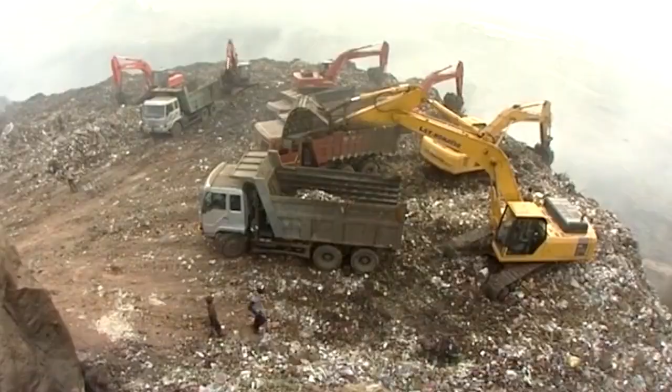health and environment. With a commitment to better the environment and to provide the best sanitation services to the citizens of Hyderabad, Ramky Enviro Engineers, a pioneer in waste management, has established a quality delivery system, the Integrated Municipal Solid Waste Management Project. The HIMSW project uses the most environmentally sound strategies for municipal solid waste.

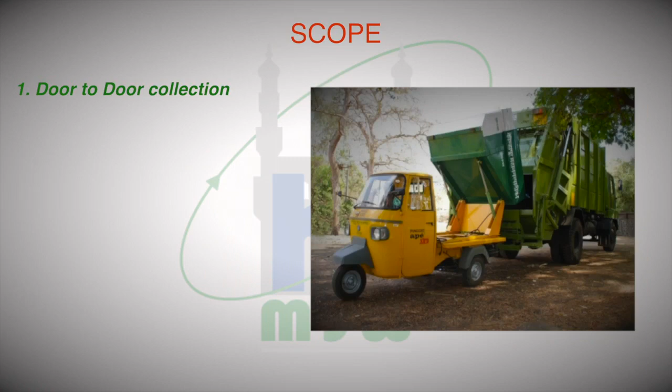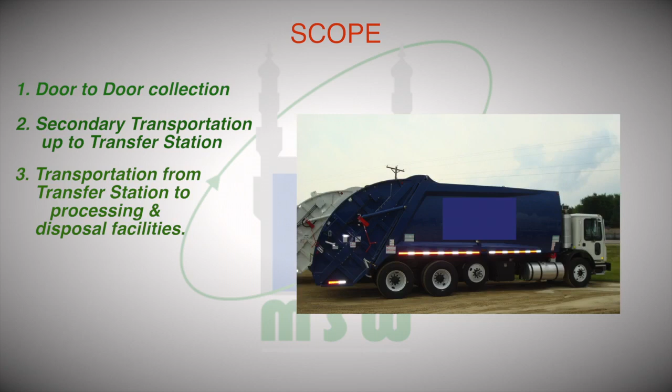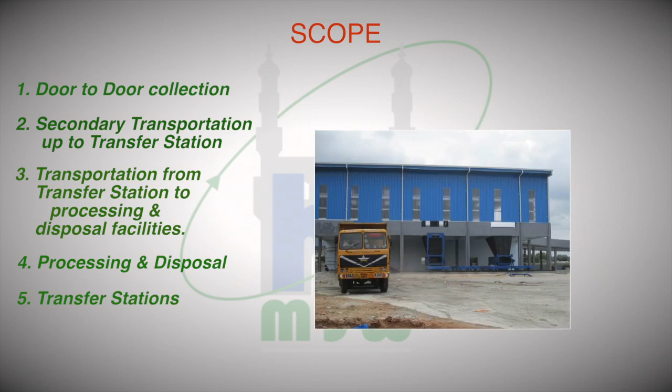Scope: door-to-door collection, secondary transportation up to transfer station, transportation from transfer station to processing and disposal facilities, processing and disposal, transfer stations, reclamation and alternative use of existing 4 dump sites.

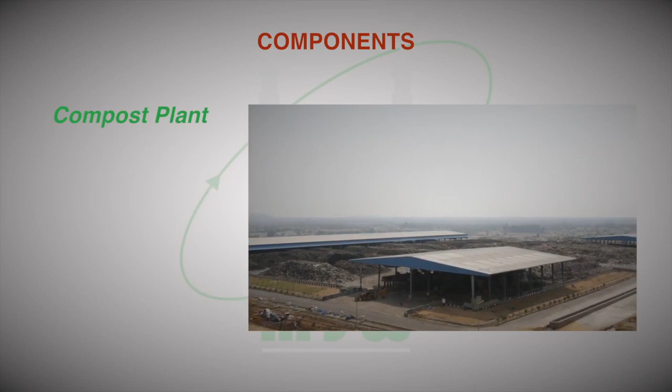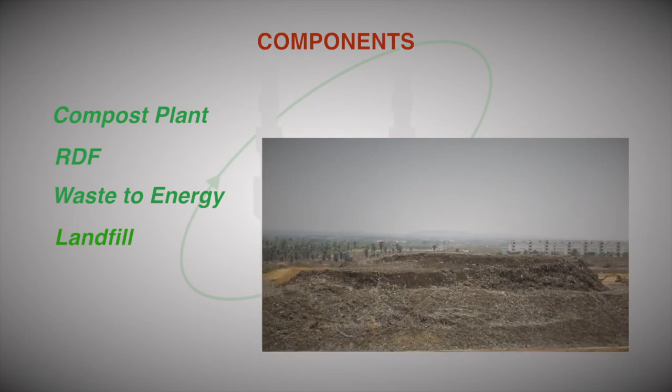Components: compost plant, refuse-derived fuel, waste to energy, landfill operations, capping of existing dump, leachate management.

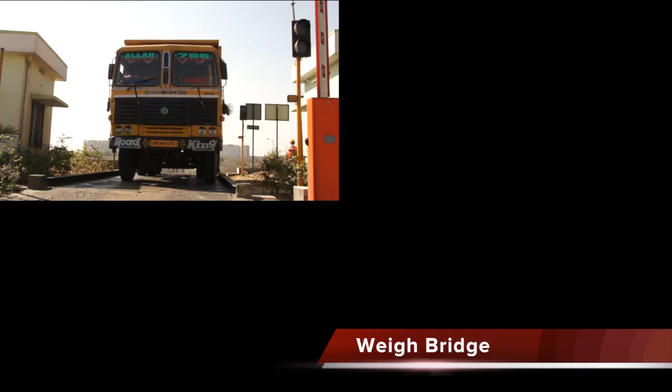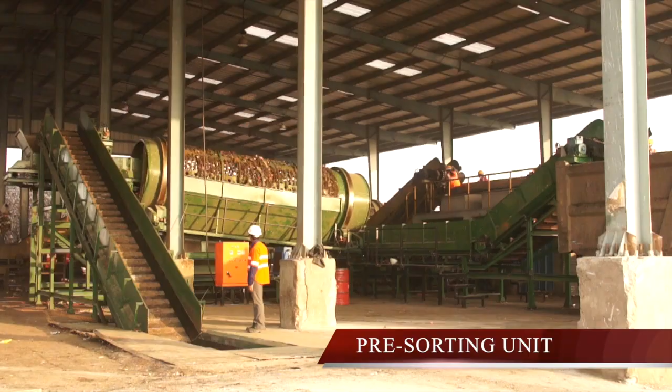The waste transported from the transfer stations is brought to the facility where each truckload is weighed and data entry is made using computers with data servers for storing and retrieving each entry. The weighed trucks offloaded at the tipping floor of the pre-sorting unit are loaded onto conveyors using dozers. The waste is passed through a 100 mm rotating screen or trommel with screens of 100 mm sieves.

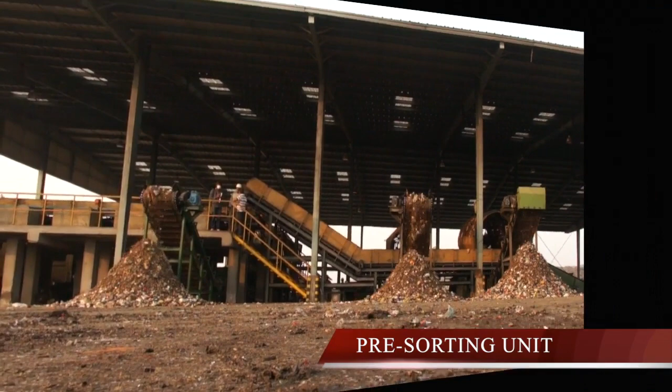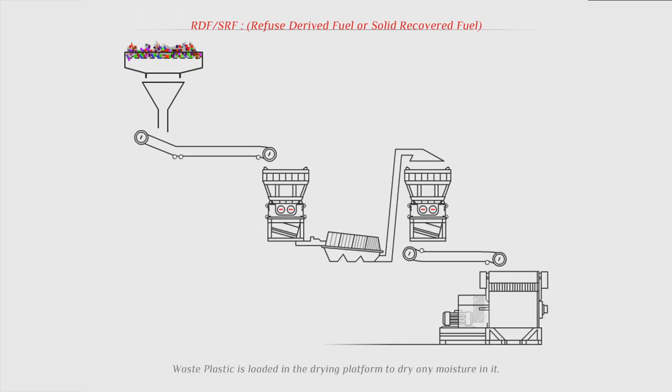The recyclable material, like plastic bottles, is recycled at a recycling plant inside the facility. The material besides the recyclables, with size more than 100 mm, is known as combustible material due to high calorific value. Refuse-derived fuel. The segregated combustible material is further processed to get refuse-derived fuel or solid recovered fuel. The combustible material is stored on a dry concrete platform to ensure maximum moisture removal by sun drying.

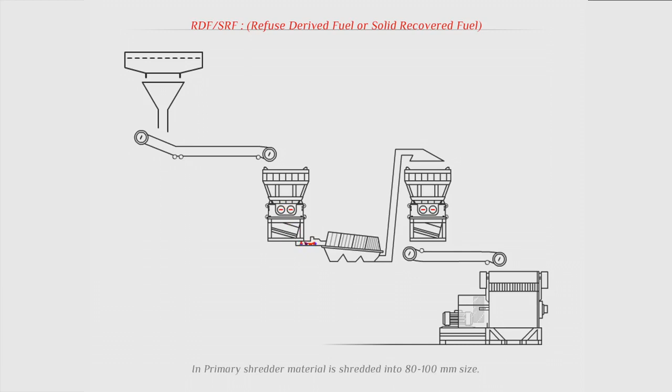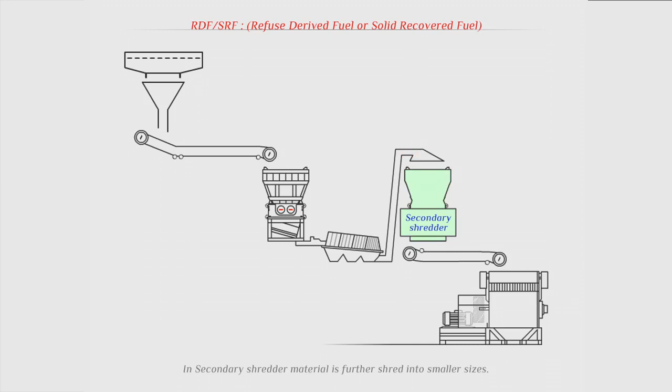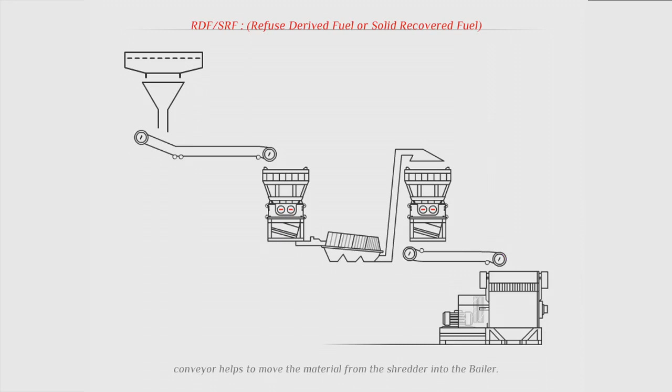The dried material is fed to the hopper of a primary shredder, where the material greater than 100 mm is shredded to 80 to 100 mm material. The primary shredded material is fed to the hopper of a secondary shredder that reduces the material size to less than 25 mm. The secondary shredded material is then conveyed to a baling machine for packing the material. These bales are then stretch wrapped and transported to cement industries as fuel.

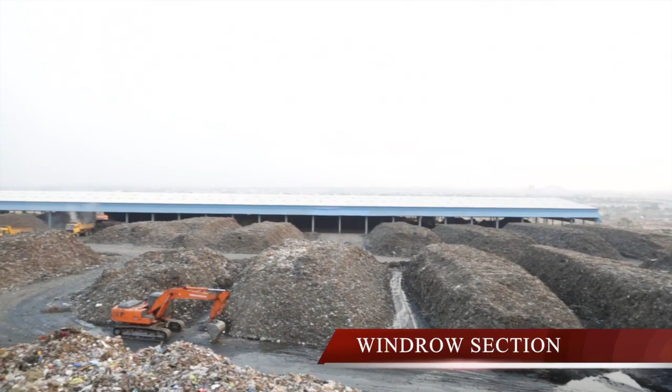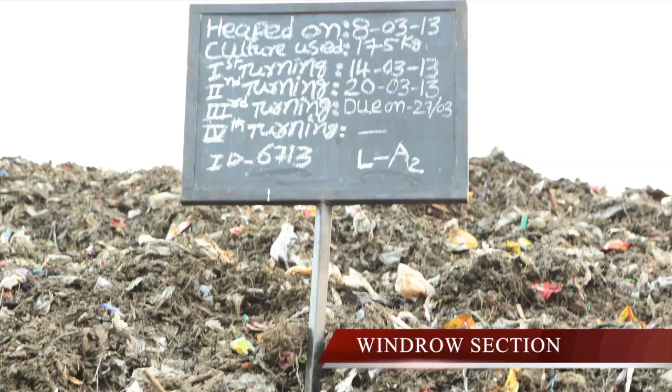The segregated material passing through the 100 mm sieves of the trommel is further processed using the windrows process. The windrows are turned for 28 days to ensure complete exposure of organic material to oxygen. The windrows are sprayed with herbal sanitizers to ensure better decomposition and ensure no odor is generated.

The material from the windrows section is further refined by passing it through rotating screens of 35 mm sieves. The material with size more than 35 mm is segregated, which can be briquetted and used as an alternative fuel to fossil fuel in energy-intensive industries.

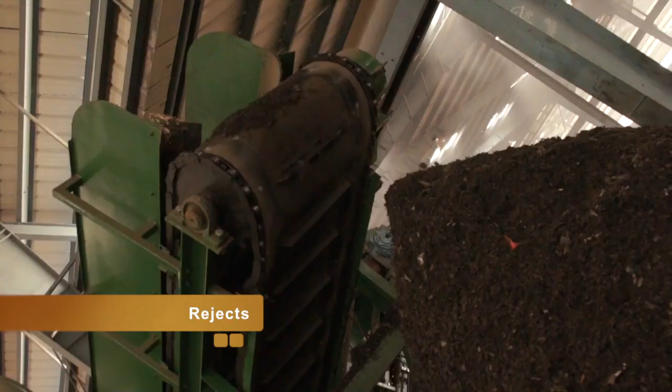Material less than 35 mm is further screened using trommels with screen or sieve size of 16 mm. The material with more than 16 mm size is segregated and briquetted for cement industries as fuel. The material less than 16 mm is stored in the curing section for final screening and curing.

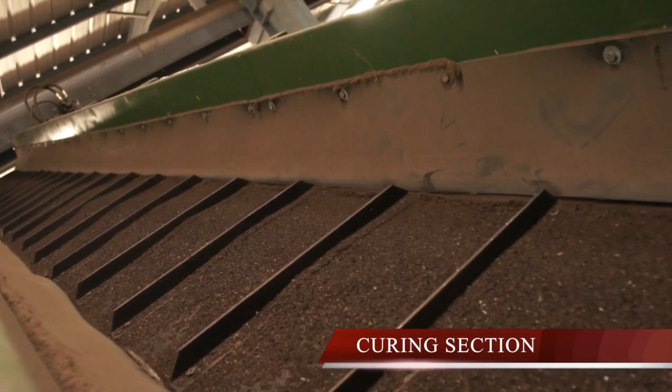In the curing section, the output of 16 mm screening is sent through a final set of screens or trommels, which segregates materials less than 4 mm. The final output is refined, which meets the fertilizer control order standards and is used as biofertilizers in the agricultural sector.

The final output is further blended with additives to improve the product value and packed in a blending and packing shed for dispatch to fertilizer companies. Other recovered products include coconut coir pith from shredding of coconuts. The coir is baled and sent to small-scale industries and as fuel to factories.

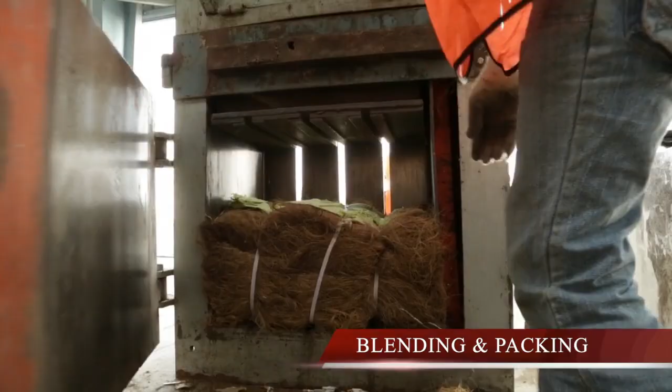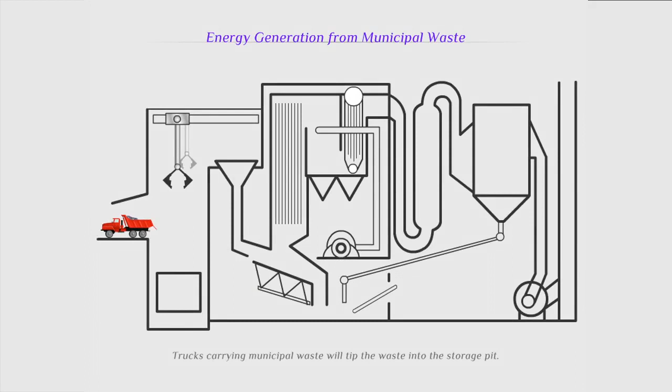Waste to energy. The waste from the trucks is tipped in a storage pit. The storage time for the waste is 7 days with leachate drainage for charging the waste. The charged waste is fed to a hopper using cranes.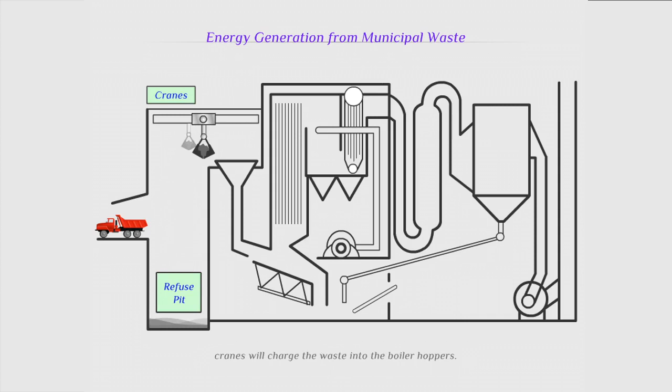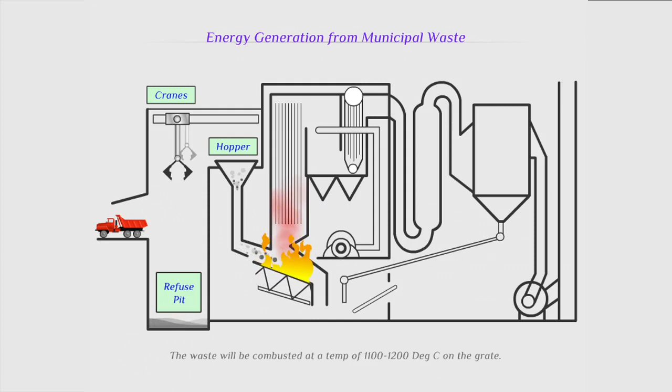The waste is then passed on to moving grates that combust the waste at a temperature of 1100 to 1200 degrees centigrade. The engineering design of the furnace ensures that the intermediate gases go through complete combustion to maintain a temperature of 850 degrees centigrade. Maintaining this temperature ensures that dioxins and furans are not formed in the process.

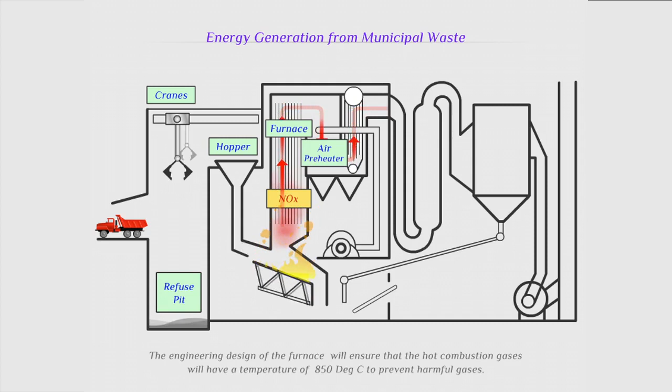The heat energy is passed into a boiler for generating superheated steam. This steam is used for driving the turbine and electricity generation. The electricity generated is exported to the grid after captive consumption of 15 to 17% of total electricity generation.

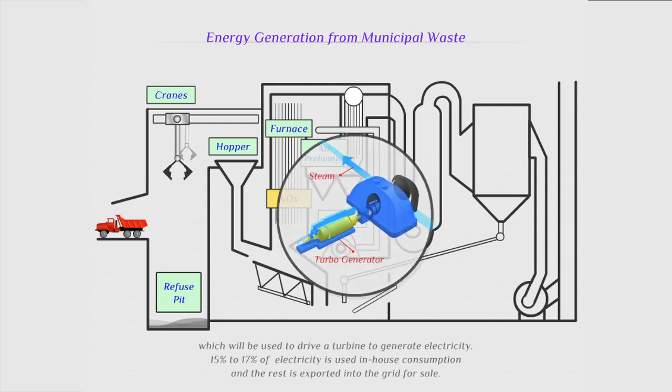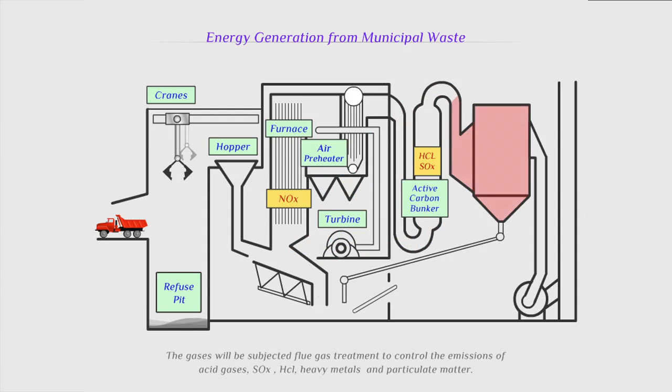The residual gases from the process are passed through an air pollution control system, which comprises scrubbers for removal of acidic gases such as nitrogen oxides, sulfur dioxide, hydrochloric gases, any heavy metals, and activated carbon filters. Any particulate matter is removed by using dust collector systems and precipitators. The bottom ash from the incineration process is removed and can be used for construction purposes.

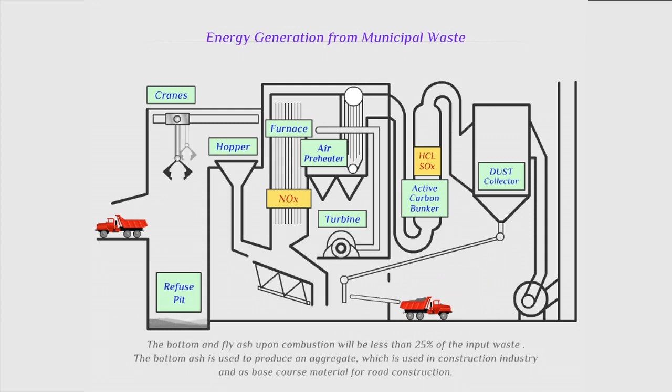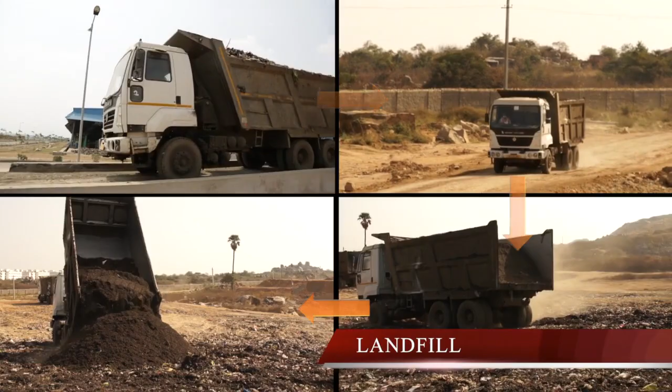Landfill. The processing of waste generates various byproducts. The inert material that is essentially present in the waste or is a rejected material of the process is disposed to a secure landfill.

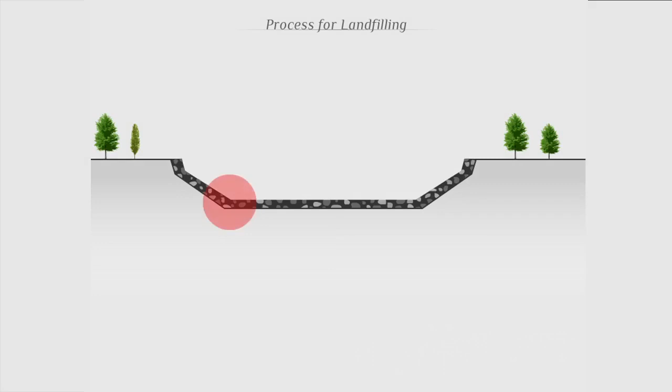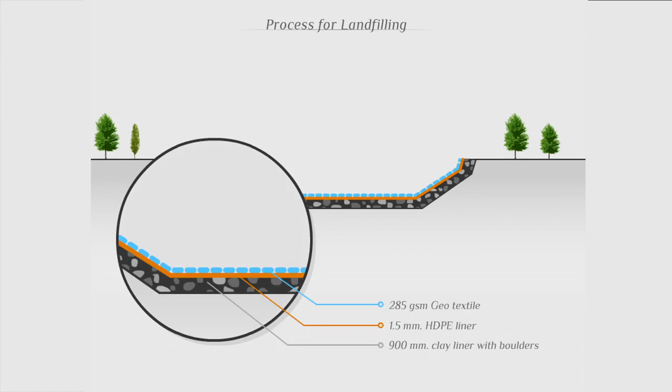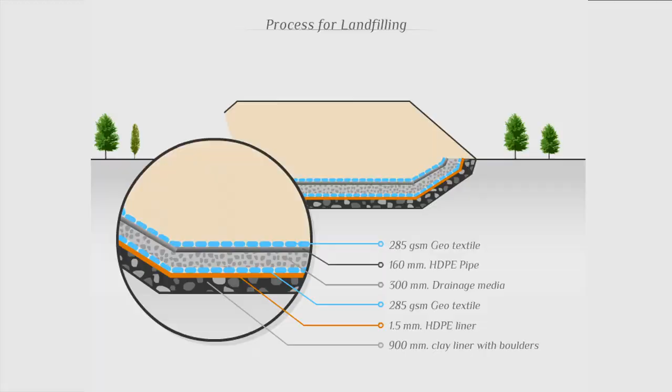The landfill comprises multiple layers of boulders, clay, HDPE sheets, geotextile, and a leachate collection network of HDPE material. These layers are of varying thickness to ensure that no leachate from the landfill percolates the soil and groundwater. Landfill operations are closely monitored to record any leachate movement.

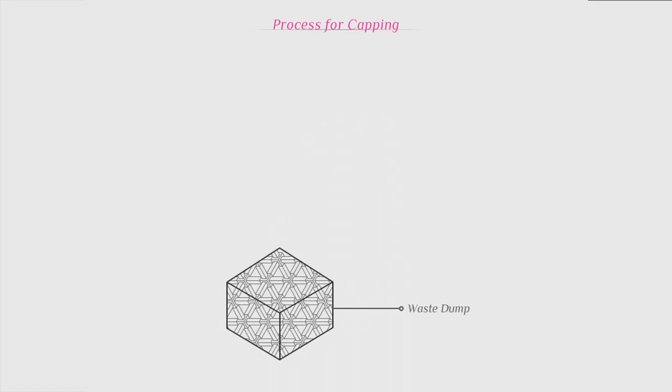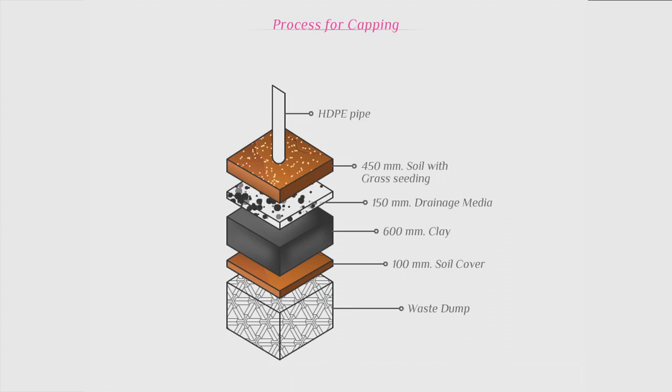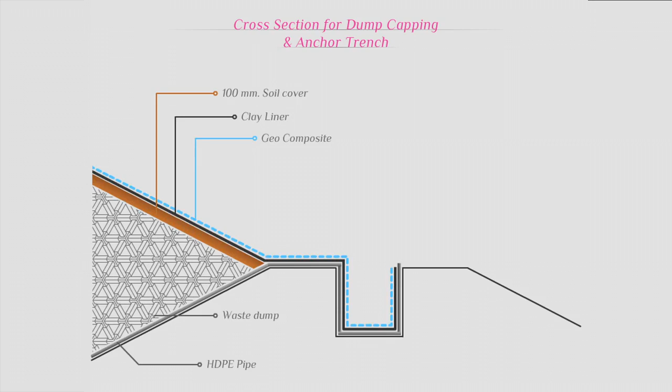Capping. The existing site for the waste management facility has the legacy of years of waste dumping. The waste dump is capped using scientific methods. The process requires laying of an HDPE piping network for collection of leachate, covering of soil followed by clay lining, geocomposites, an additional thicker soil layer, and vegetation cover. A piping network is also laid for collection of any methane gas and flaring to mitigate release of greenhouse gas emissions.

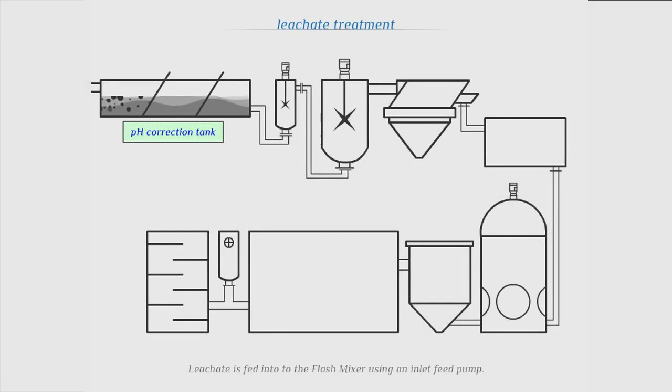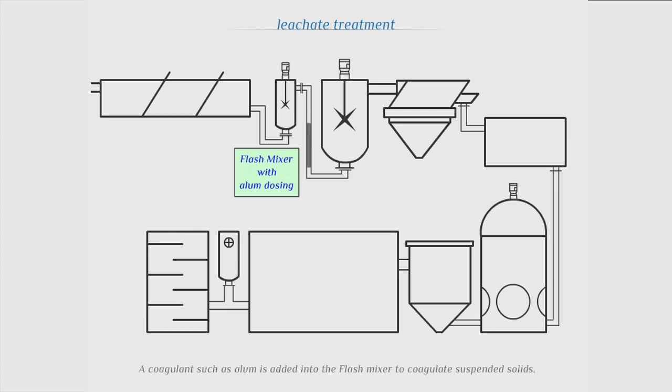Leachate management. Leachate management is a crucial aspect of the HIMSW project. All the waste stored and waste management processes generate leachate. The leachate generated at site is collected through an extensive pipeline network. Raw leachate is pumped to a chemical dosing tank with a flash mixer. Alum or coagulant is added to the tank to create flocs from the suspended solids in the leachate.

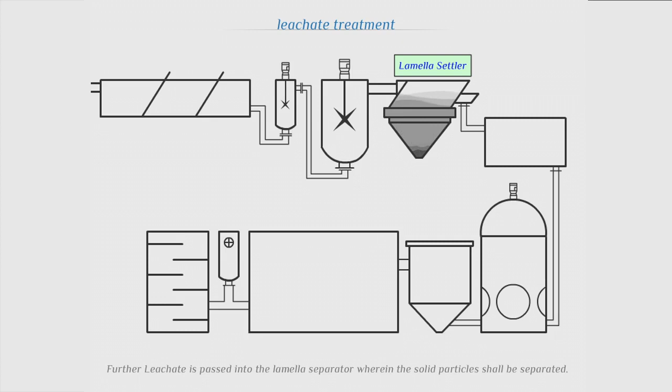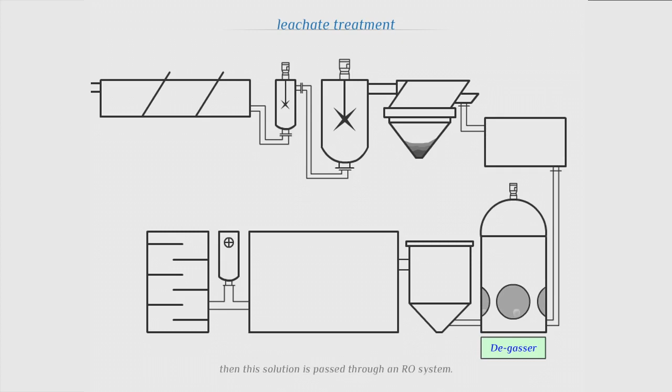The leachate is passed into a lamella settler that settles the flocs of suspended particles. The supernatant is passed through pressure sand filters that remove the remaining suspended solids and reduce turbidity. The leachate is then passed through a two-stage reverse osmosis system, which uses membranes for filtering the leachate of all contaminants and provides clear permeate, which is used for greenbelt and landscaping development.

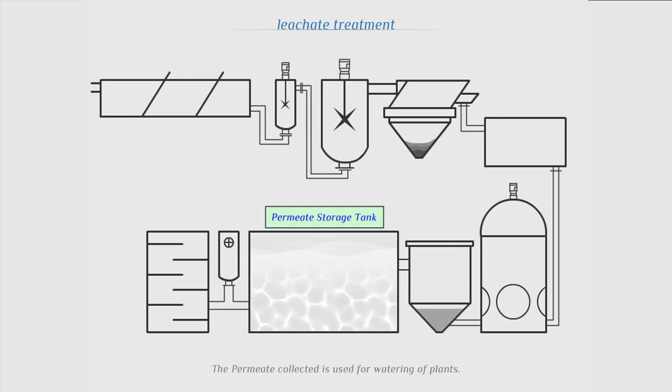As we do our bit for the environment and for the generations to come, we strive to deliver service excellence to save natural resources, conserve energy, reduce pollution, reduce the toxicity of our waste, and save money for consumers and businesses. The project is a model for inclusive and sustainable development for our society. HIMSW extends the vision of Ramky Group towards sustainable development.